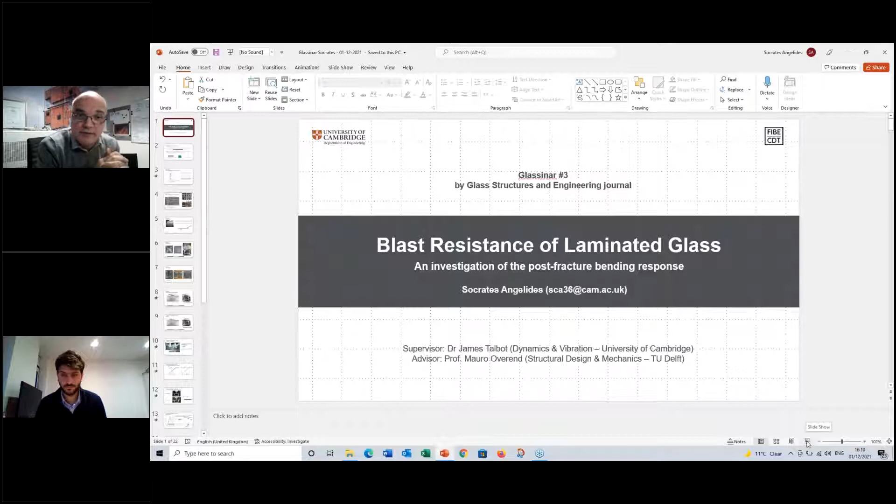So Socrates is, as his name might imply, originally from Greece, but he studied civil engineering at Imperial College, with a master's degree there, and then he worked for three years as a structural engineer in the oil and gas industry, before eventually, in 2016, returning to university, where he joined the University of Cambridge to do a PhD in the blast response of laminated glass panels, under the supervision of Dr. Talbot. And I also am co-supervising his work, so I know a little bit about it.

But he's really developing some really exciting models on the mechanics of failure of laminated glass that could, I think, have a positive impact and provide information on how to design glass panels for blast loading. Socrates has also spent some time at TU Delft, and he's now a research associate at the University of Sheffield, where he is working on blast load prediction. This is a research project between the University of Sheffield and the Steel Construction Institute in the UK. But with that, I will hand over to Socrates to present his research.

Thank you very much, Mauro, for the kind words, and also thank you very much for inviting me to present in this third Glassinar. As Mauro has mentioned, this presentation will focus mostly on my research findings on the blast resistance of laminated glass. This presentation will primarily focus on two papers of the Glass Structures and Engineering journal, one that was published in 2019 and the other that was recently submitted. At this stage, I would also like to acknowledge the contribution from my sponsors, the Engineering and Physical Sciences Research Council and the Institution of Civil Engineers. These sponsors have sponsored my PhD, and I would also like to acknowledge the in-kind contributions from Kuraray, DJ Good and Associates, and Tough Glaze.

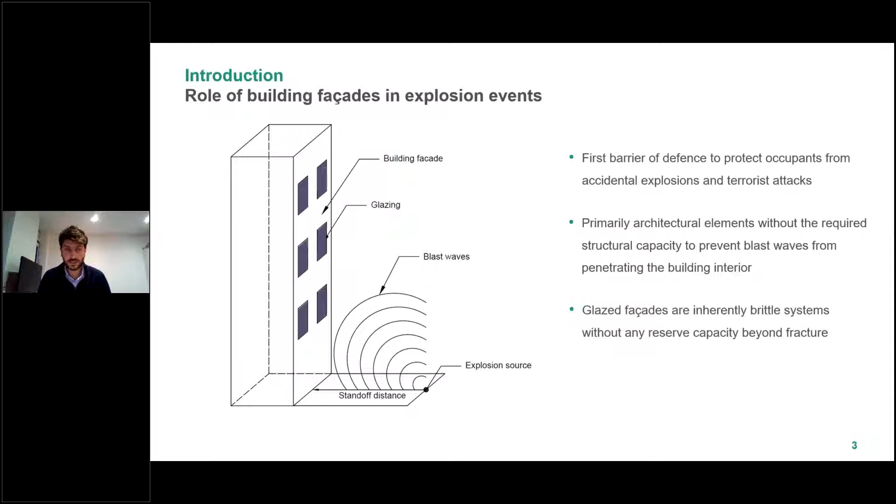Renewed focus on the threat posed to buildings and their occupants by terrorist attacks has intensified the demand for blast-resilient buildings. This requires facades to act as a first barrier of defense to protect occupants. However, these are primarily architectural elements and are often inherently brittle, as is the case for glazed facades. Multiple glazing failures were observed in the recent disaster in Beirut, with many damages occurring kilometers away from the explosion source. Consequently, the blast wave penetrated the building interior, resulting in financial damages and harming occupants. Additionally, a large percentage of injuries were glass-related, as is often the case in most blast events.

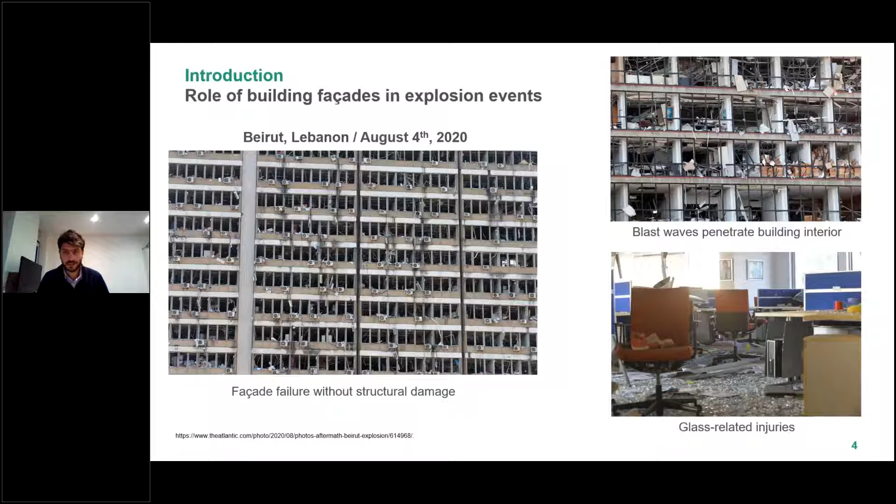As a result, laminated glass is increasingly installed in facades to enhance the blast resilience of buildings. These composite panels offer residual resistance and are capable of providing resistance beyond the fracture of the glass layers, and also reduce glass-related injuries as the glass fragments remain attached to the interlayer. The blast response of these panels, however, is complex and often requires assistance from blast testing to validate designs.

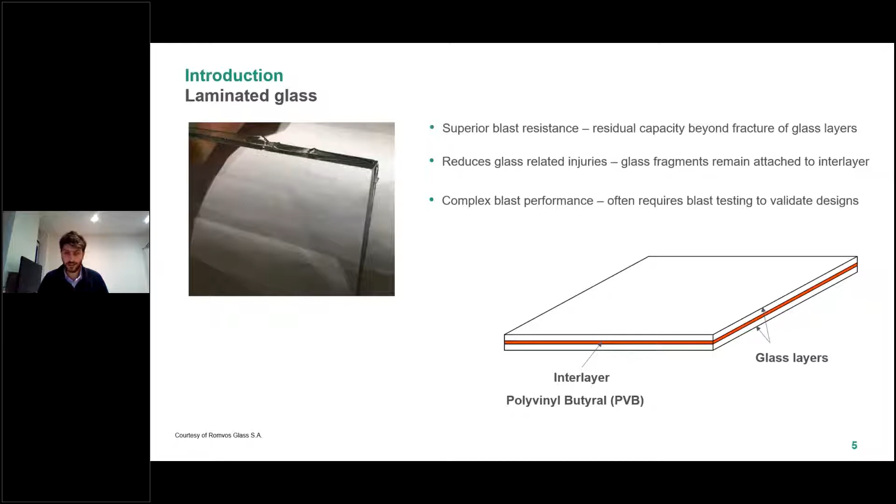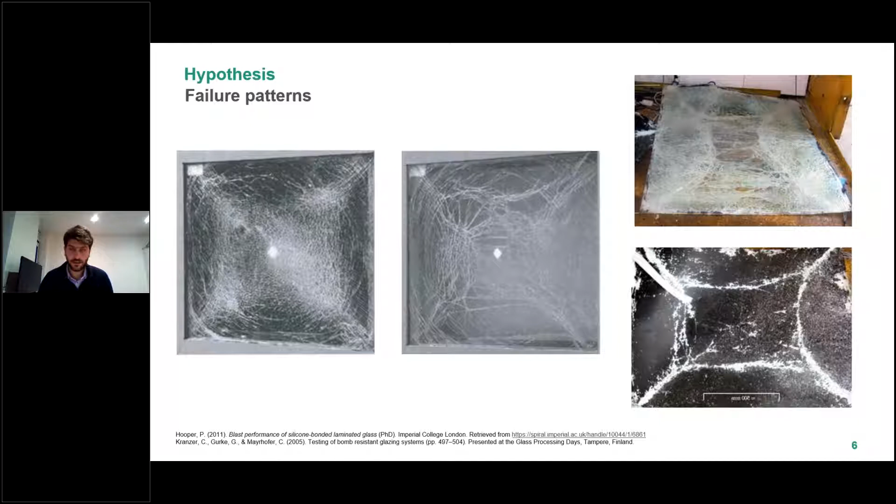The starting point in my research was to study the failure mechanisms in laminated glass recorded by previous researchers during full-scale blast tests. I observed a repeated failure pattern that was consistent in almost all tests. This failure pattern resembles the yield line mechanism forming under bending in reinforced concrete slabs. Given the similarities between laminated glass and reinforced concrete, that is, both are brittle materials reinforced with a ductile material, I decided to investigate if this repeated failure pattern in laminated glass is in fact a yield line pattern.

To achieve this, I first examined if there is any residual post-fracture bending moment capacity in laminated glass following the fracturing of the glass layers. My second objective was to assess if the effects of inertia experienced by laminated glass panels during a blast event are responsible for the different pattern observed compared to the well-known yield line pattern forming under static loading in reinforced concrete and other ductile materials.

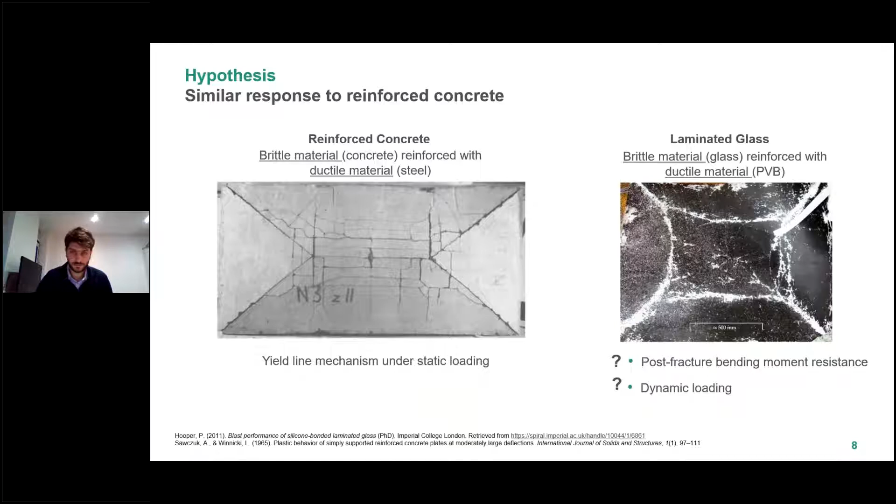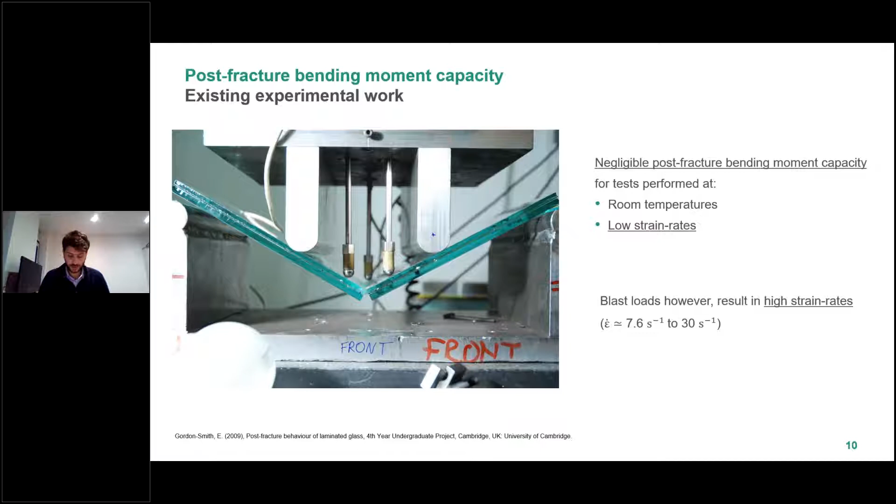Starting with the post-fracture bending moment resistance of laminated glass, previous experimental work on pre-fracture specimens has demonstrated that this is negligible for specimens with polyvinyl butyral interlayers. However, these tests were performed at low strain rates, as opposed to the high strain rates anticipated under blast loading. This is important as the PVB interlayer is a thermoplastic polymer that becomes significantly stiffer at high strain rates. The response under blast loading is therefore fundamentally different compared to the previous experimental work at low strain rates.

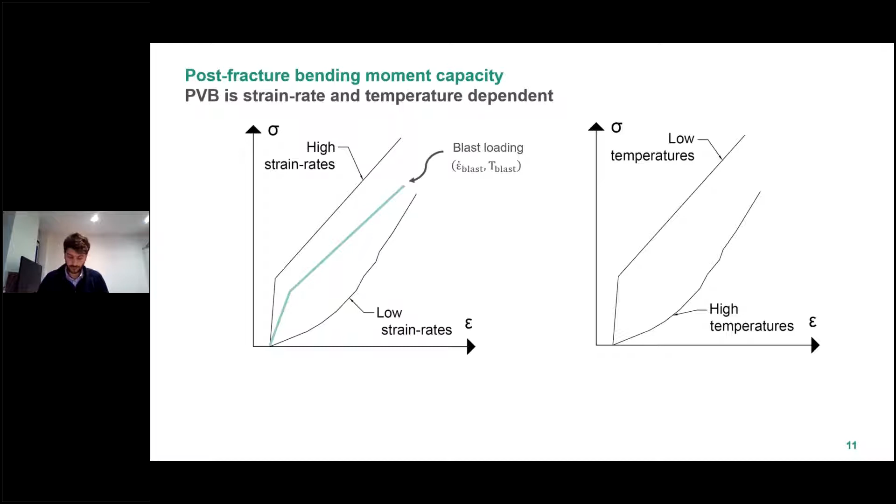PVB is also sensitive to temperature, and using previous experimental work, I demonstrated that there is a time-temperature dependency similar to many other polymers. Therefore, the PVB response at high strain rates can be simulated with low temperatures by deriving a time-temperature mapping equation. This uncouples inertia effects and allows the investigation of the pseudostatic bending moment capacity.

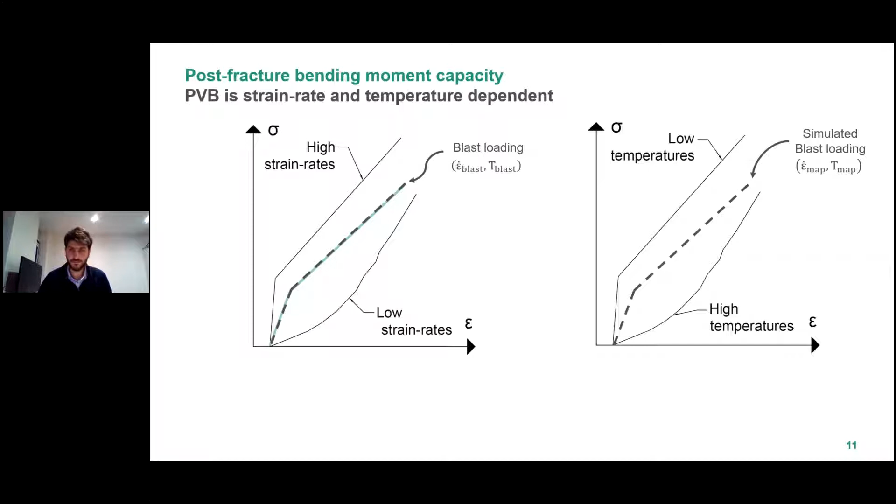Quasi-static bending tests of pre-fracture specimens were therefore performed at -100 degrees Celsius and were compared to room temperature tests to assess the influence of high strain rates. An idealized pre-fractured pattern was considered with the cracks aligned in both glass layers and spaced every 20 millimeters. Using the mapping equation derived, a maximum PVB strain rate of 25 per second was calculated at a temperature of 25 degrees Celsius, which is a typical value expected under blast loads.

A comparison of the load displacement response recorded from the low and room temperature tests indicates a significantly stiffer response at low temperatures. The results of the low temperature test demonstrate an enhancement of the ultimate load capacity of the fractured glass by 2 orders of magnitude compared to that at room temperature. This suggests an improved post-fracture bending moment capacity at low temperatures associated with the now stiffer interlayer working in tension and the glass fragments working in compression. Due to the time-temperature dependency of the PVB, a similar enhancement is therefore anticipated at the high strain rates associated with typical blast loading.

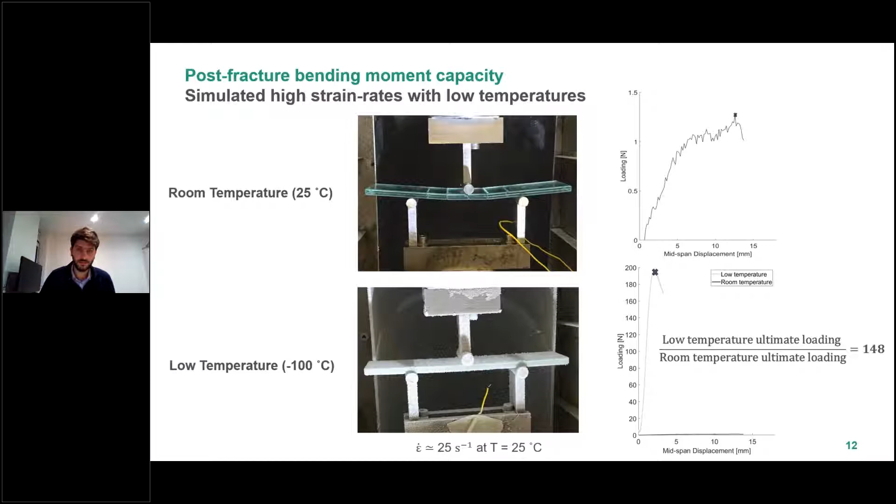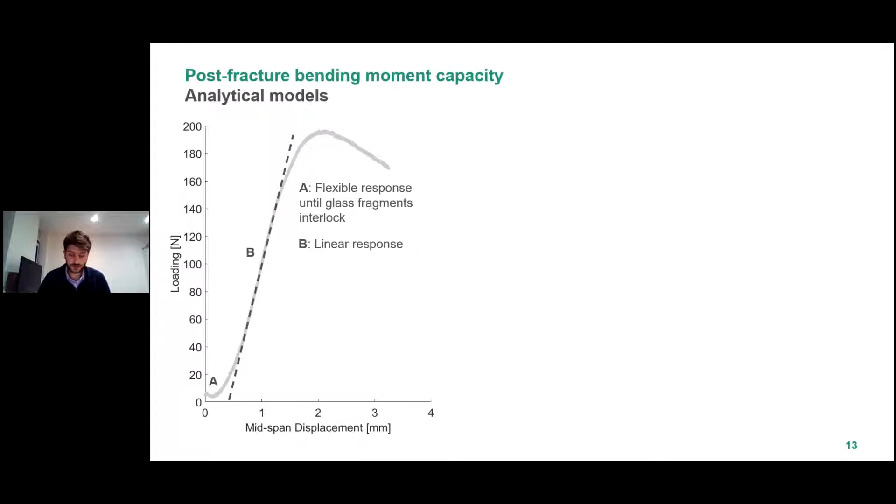Based on the experimental results from the low temperature bending test, analytical models were developed to describe the post-fracture bending moment capacity of laminated glass. Following the initial flexible response until the glass fragments interlock, a linear response is observed and the fractured panel bends elastically in a composite manner. At this stage, the PVB is in the initial slope of its stress strain diagram, and although it resembles an elastic material, it in fact remains viscoelastic.

The bending moment capacity was derived for this stage under the assumptions of plane sections remaining plane and by applying the transformed section approach commonly used in analysis of reinforced concrete. The compression component in the bending moment is provided by the glass fragments that come into contact as the panel deforms, and the tension component is provided by the interlayer. A nonlinear response is observed in the next stage due to the change in slope in the PVB material model. Although this transition point is often referred to as yield stress, it only refers to the stress at which a significant change in modulus is observed rather than the onset of true plasticity.

A plastic hinge eventually forms when the top glass layer crushes in compression, resulting in a collapse mechanism for the simply supported specimens tested. The moment capacity for this stage is derived by taking moment equilibrium about the plastic neutral axis. In the final stage, the PVB tears when the failure strain is reached. The response, however, is anticipated to be more ductile under blast events, as the low temperature results in a stiffer adhesion bond that inhibits the delamination of the glass fragments and causes brittle fracture of the PVB.

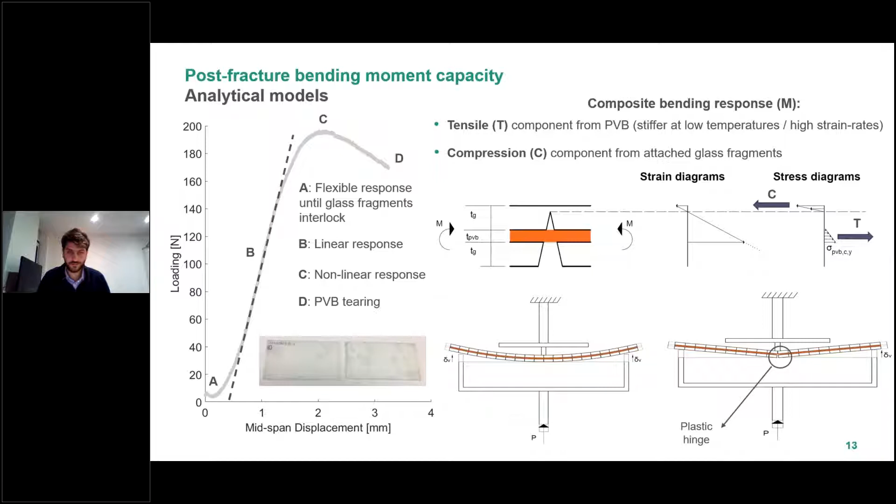The exact same tests were also repeated on specimens with both thicker glass layers and thicker interlayers. An increased ultimate loading capacity and therefore post-fracture bending moment capacity was recorded consistently for all the thicker specimens tested. Therefore, the experimental results were in agreement with the predictions of simple bending theory.

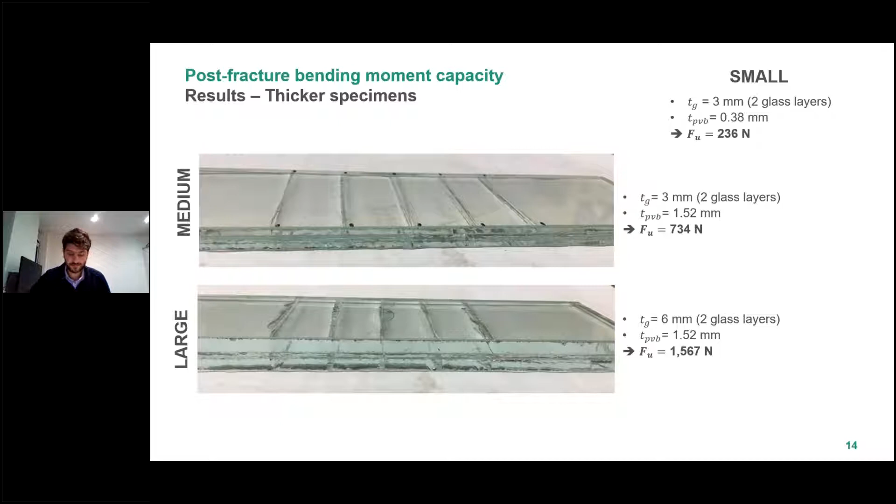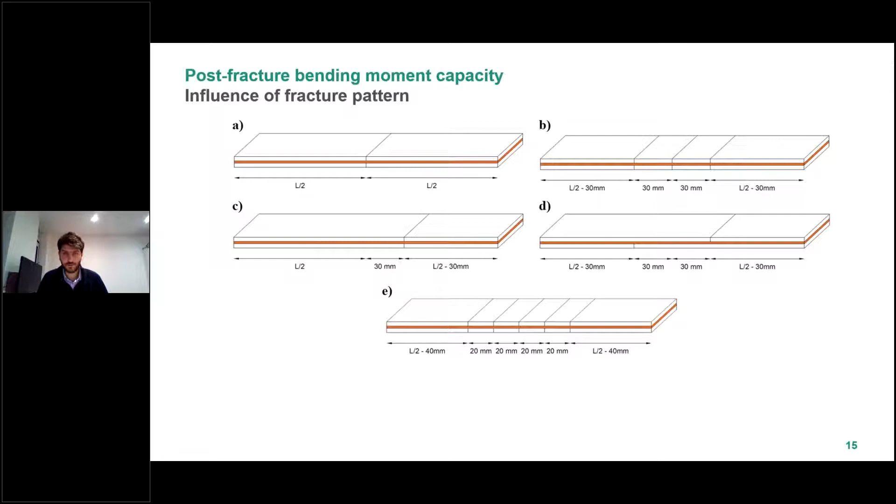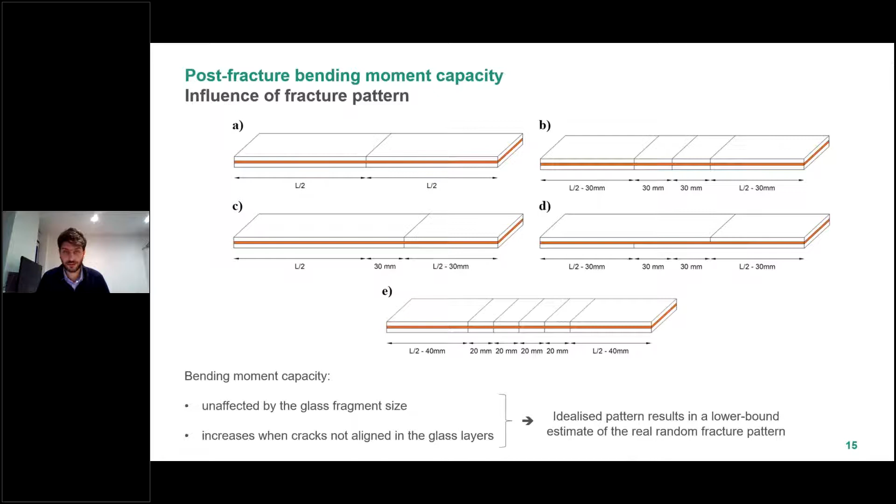To assess if the idealized pre-fracture pattern considered is representative of the random fracture pattern forming under blast loading, the low temperature bending tests were also repeated on specimens with different pre-fractured patterns. The key conclusions of this investigation were that the bending moment capacity is unaffected by the glass fragment size, and it also increases when the cracks are not aligned in the glass layers. Therefore, we can conclude that this idealized pattern will result in a lower bound estimate of the post-fracture bending moment capacity for a specimen with a real random fracture pattern forming under blast loading.

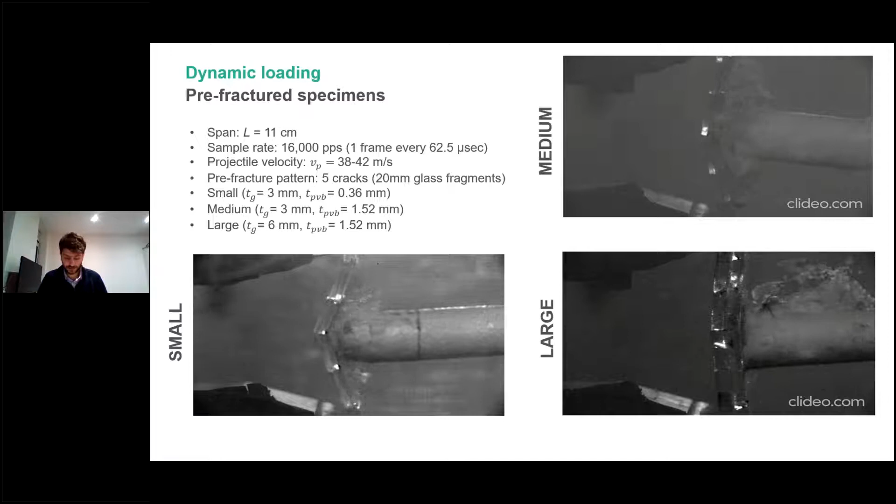Now moving on to dynamic loading, to investigate the effects of inertia, I performed impact tests by launching foam projectiles from a gas gun and recording the response with a high-speed camera. The pressure time history resulting from this impact simulates the positive phase of blast loading. The same specimens, pre-fracture patterns, and span as the low temperature bending tests were considered in the impact tests to directly assess the influence of inertia.

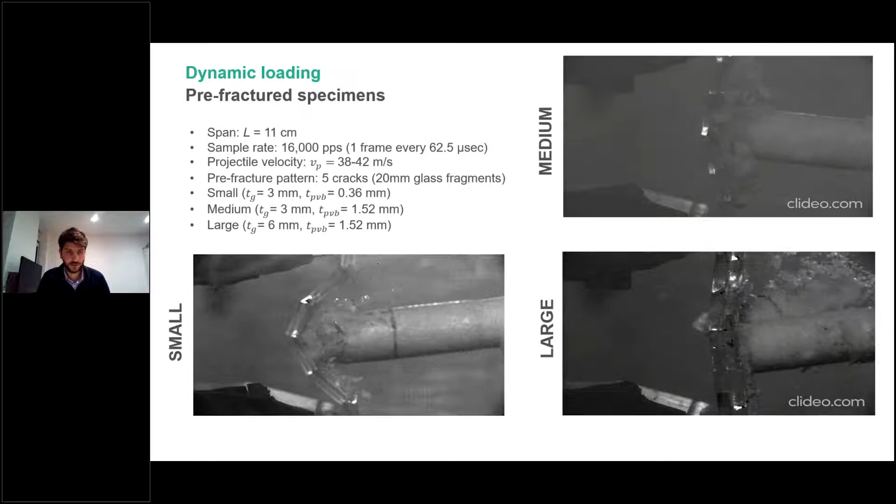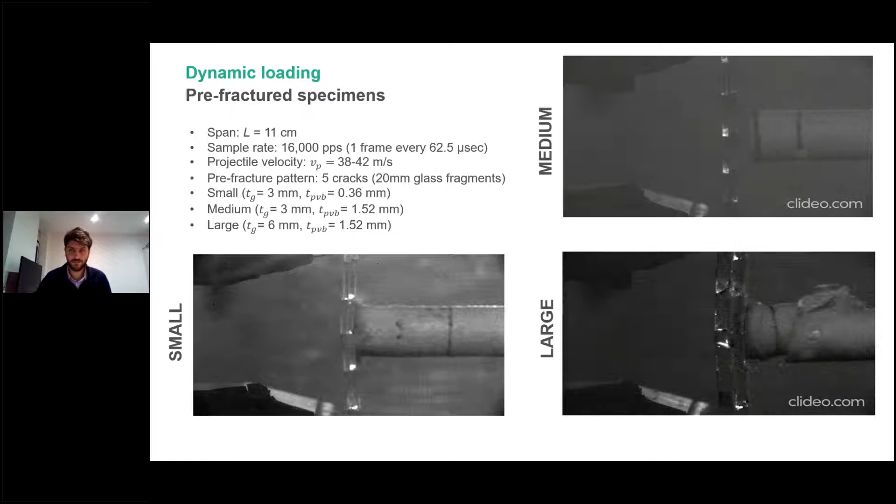PVB tearing was observed in the smaller cross-section specimens, as can be seen in the lower left video. You can see the tearing occurring right now. On the other hand, the medium and larger cross-section specimens were able to deform under large deflections without the interlayer tearing, as observed in the other two videos on the right-hand side.

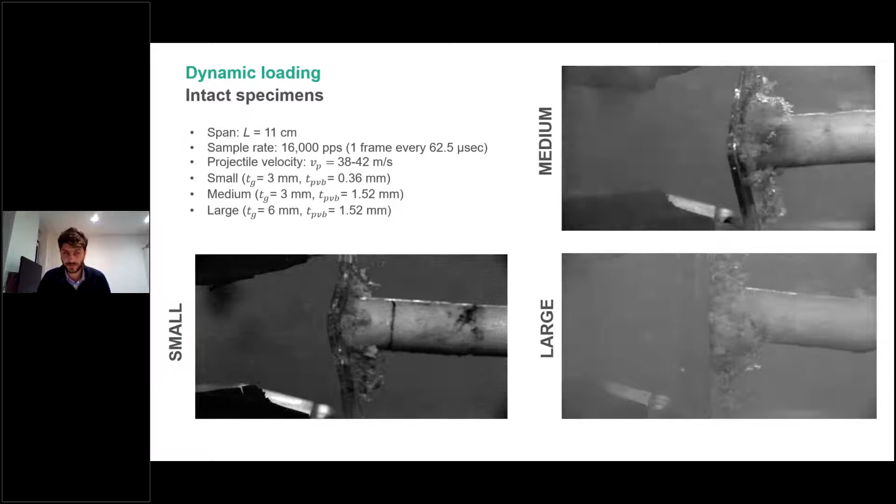The same tests were also repeated on intact specimens to assess the transition from the intact stage to the post-fracture stage. In this case, the loading was not high enough to fracture the larger specimens, as observed in the bottom right-hand video. The response of the smaller and medium cross-section specimens was similar to that observed for the pre-fractured specimens.

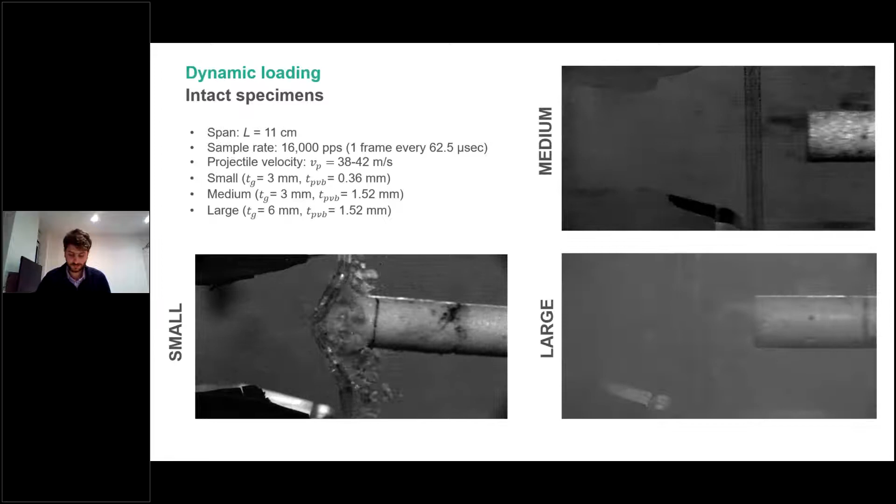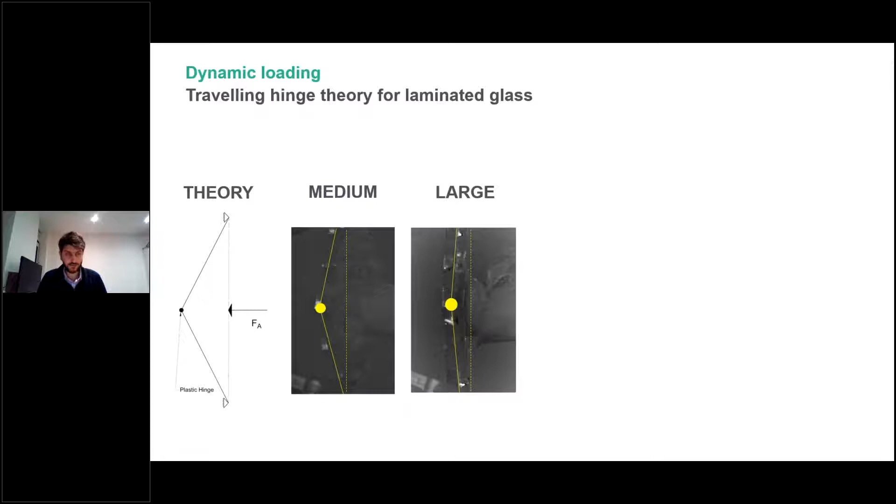The deformation patterns recorded with a high-speed camera demonstrate that the theory of traveling hinges applies to laminated glass. A global collapse mechanism, with the specimens deforming as two rigid bars connected with a single plastic hinge at midspan, was observed for the medium and large specimens. This agrees with a well-known collapse mechanism forming in simply supported beams under a static point load at midspan.

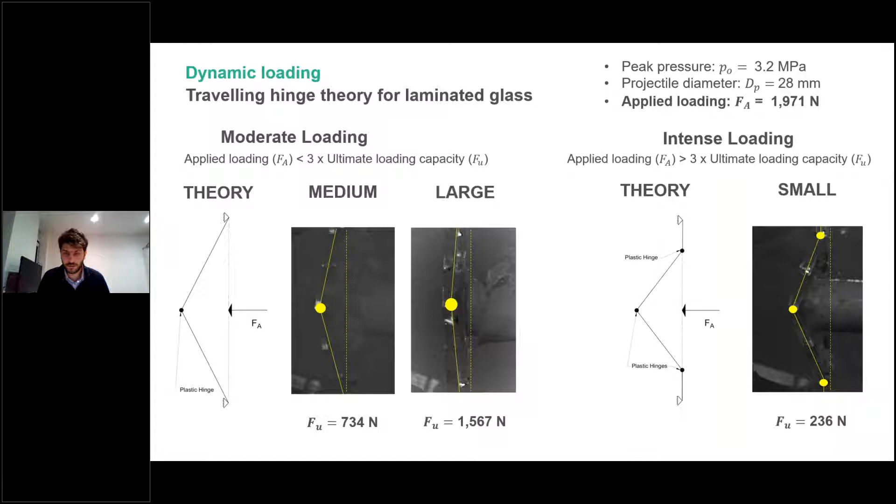On the other hand, the collapse mechanism observed for the smaller specimen is more localized, and 3 plastic hinges can be observed. This agrees with the theory of traveling plastic hinges when a short duration pulse with intense magnitude loading that is greater than 3 times the static collapse mechanism is applied. This was actually the case for the smaller cross sections tested here, when considering the recorded ultimate loading from the low temperature bending tests.

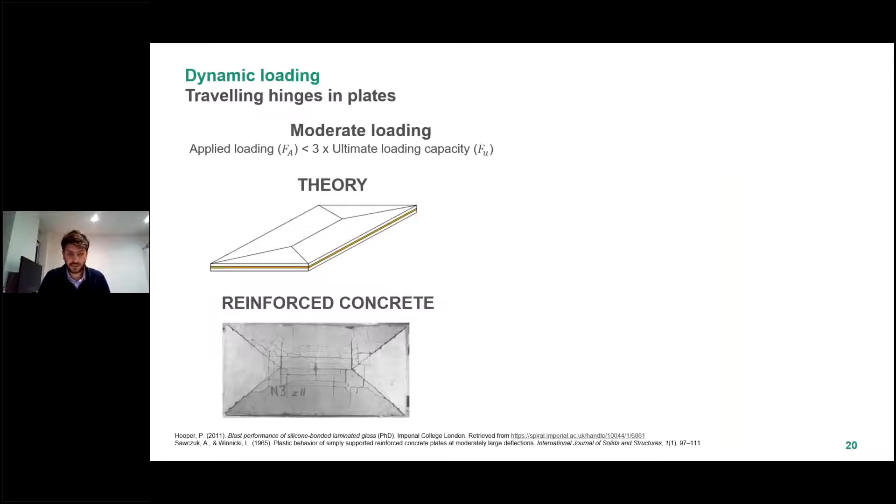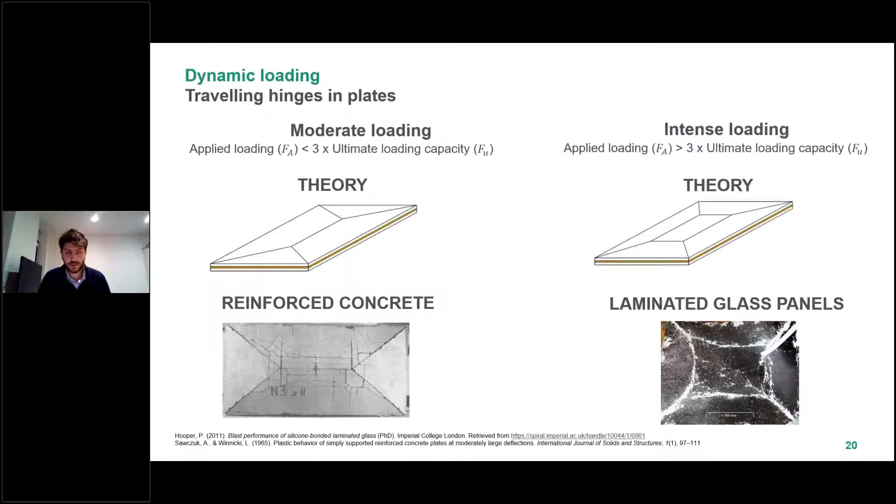These conclusions from the one-way spanning beam specimens are very important, as when these are extended to 2-way spanning plates, it can explain why we observed a different yield line pattern in reinforced concrete when a uniform static load pressure is applied, compared to laminated glass when a dynamic short duration intense magnitude loading is applied to the entire panel. And this is why we see a different yield line pattern.

Therefore, these simplified small-scale tests, namely the low-temperature bending test and the impact test by launching foam projectiles from a gas gun, were able to demonstrate that the repeated pattern that we observed from blast tests is due to an enhanced post-fracture bending moment capacity occurring due to the effects of strain rates. Due to the inertia arising from dynamic loading, we observed a different yield line pattern compared to the static loading.

The next steps of my research will try to focus on how to complement or improve existing analysis methods or testing methods for designing laminated glass panels under blast loading. Thank you very much.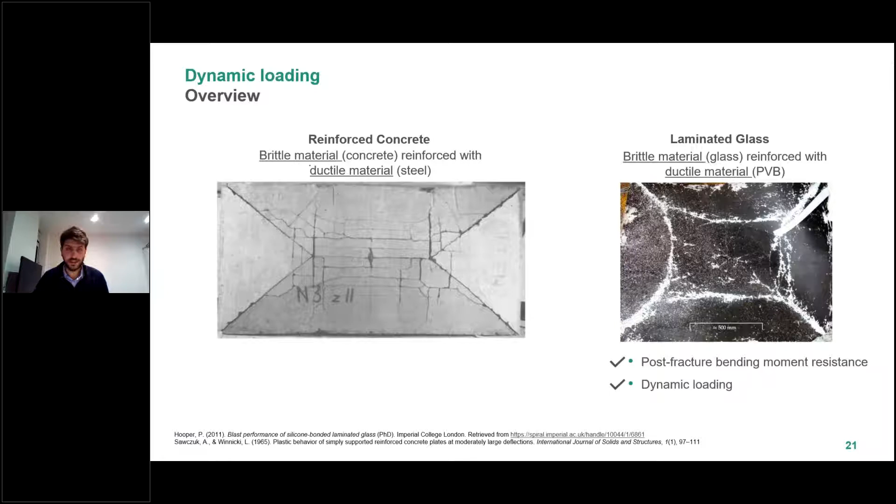Thank you very much, Socrates. That was really very well presented and very clear.

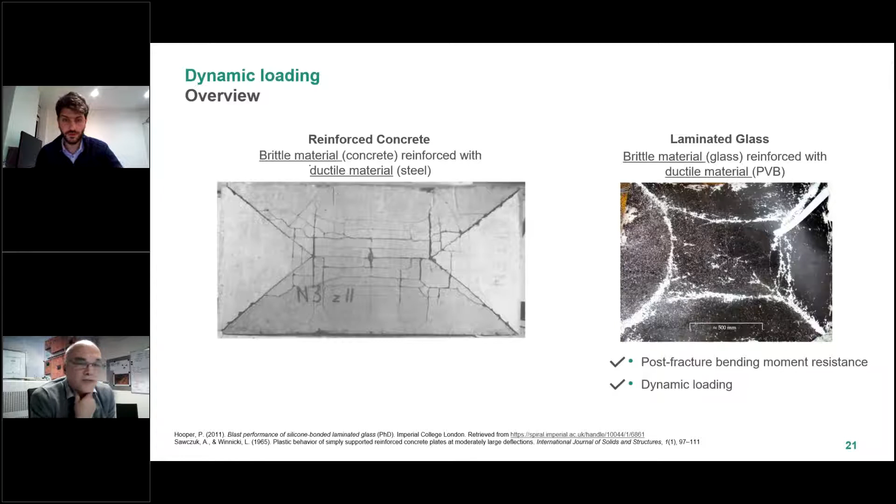Yeah. Thank you. I think to some extent that's the power of the method that you are proposing, right? That these yield lines actually form as long as you have fragmentation in your glass from some event. Then you can set up this yield line pattern on the glass. And maybe you can give us a sneak preview: you have already some ideas on how this could be validated on a larger scale. It's not necessarily something you might do in your research, but as a follow-on. How could we validate these findings on a larger scale?

Yeah, so I imagine some ways of doing that would be extending the test to two-way spanning plates. So either doing shock tube tests with two-way spanning plates and observing the bending response and seeing if these yield lines will form. I think I've seen some papers that can record the deformation at different timestamps, and you can see the fragment pattern evolving with time. So this is a good start to say that we've seen it in one-way spanning with simply supported beams with a point load in the middle. We've seen it with two-way spanning plates with a uniform pressure. So that's a good start to say that this theory of traveling hinges actually applies.

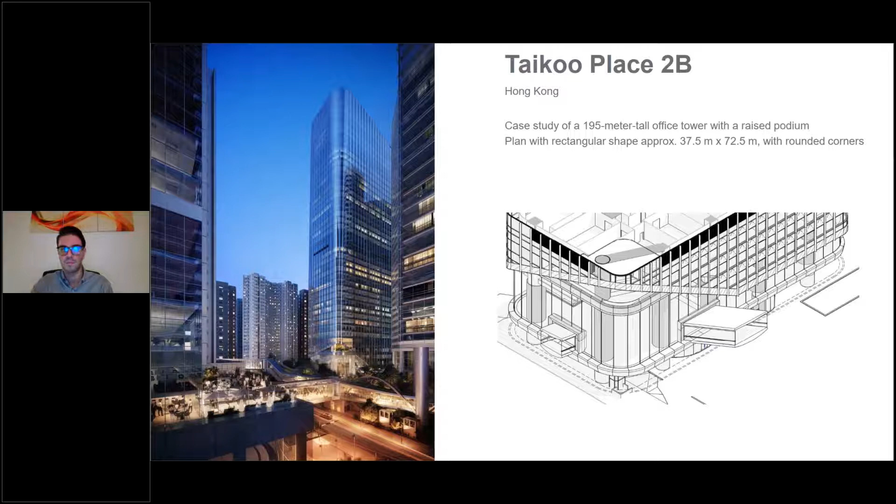Hello, thanks Jan for the introduction and for having me here. So as you said, we're going to talk through the glass facade of the Taikoo Place 2B podium wall. Taikoo Place is a 195-meter tall office tower in Hong Kong, with a rectangular shape of approximately 40 by 70 meters. We carried out the design of the whole facade system, so also the curtain wall and the ground floor area. But what we are going to focus on now is the design of the podium, which wraps around the four sides of the facade.

The design intent from the client and architect was to have maximum transparency to show the grace room, as the architect calls this podium area. Different options were explored in the schematic phase of the project, from glass fins to cable wall facade, but nothing was really going towards the aim and the brief of the facade. So at the end, what we pushed forwards was this kind of hybrid solution, which sees jumbo glass panels, so full height glass panels supported by pre-stressed stainless steel rods, which lie entirely in the buildup of the glass. So they don't add any depth to the facade, and therefore they maximize the transparency and the show of the grace room, as you can see from these renders from MBJ, the architect.

For the system description, the facade was wrapping around all four sides of the podium, but clearly with varying height, and therefore not all the areas needed a pre-stressed cable. So in the four elevations of the podium, we show where the pretension facades are. In this area the glass is up to 15 meters tall, while in all the other areas the glass goes up to 4 meters, and the system was basically a simply supported beam spanning from top to bottom.

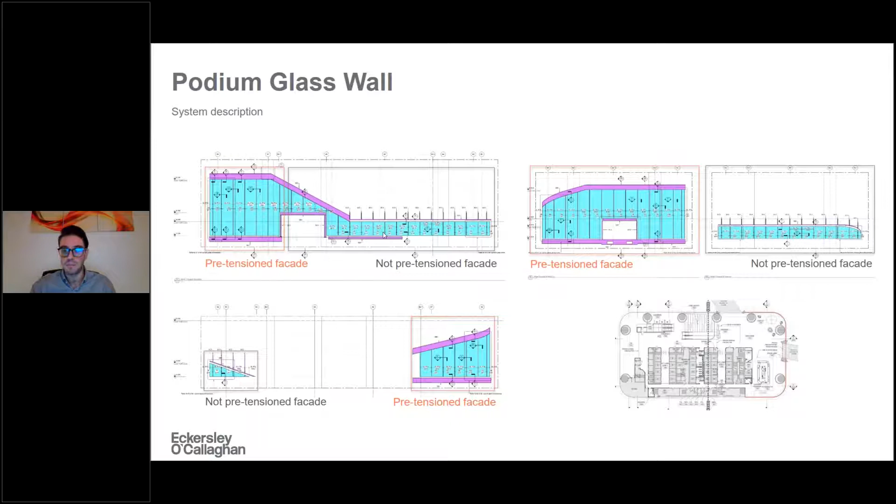The system itself sees basically an independent set of top and bottom steel structure, which spans between the columns, and the span between the columns can be up to 21 meters in this project, because there are a minimal number of concrete columns for the primary structure. The rods are therefore connected to the two beams, spanning top and bottom from the two beams.

While the glass is sitting on the bottom steel beam, so therefore the dead load of the glass is entirely taken by the bottom beam, and is clearly restrained laterally for out of plane loads and connected to the rods on the two vertical edges and to the top and bottom steel beam on the short horizontal edges.

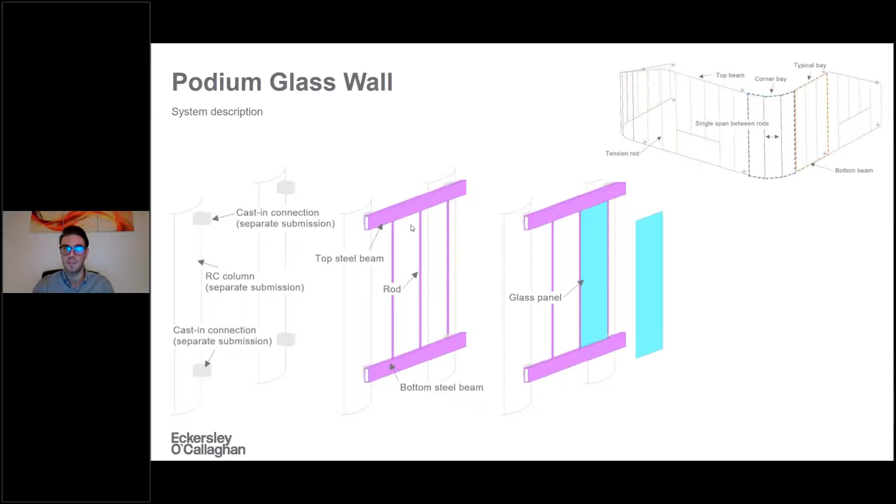One of the critical areas, probably the most interesting area of the project, was clearly the corner. And this is because of the shape of the facade, where we have this rounded corner, and therefore the interfaces between flat and curved, and then again flat panels. Because of the geometry, because of the high load, we're talking about a Typhoon area as mentioned in the title, therefore we got a peak of 3.5 kPa of wind load as a characteristic load here. So quite a high load, especially for the span of the facade, 15 meters.

Therefore, we had to understand a bit better the behavior and how to cope with these different interfaces that we have. What we did was identifying mainly three interfaces. What we call the typical interface A, which is basically between flat panels, which experience a very similar behavior as the geometry is similar. And then we identified interface B, which is between curved panels. Because of the geometry, the two curved panels will tend to move radially in different directions. Therefore, they will experience mainly tangential expansion when under suction, and the joint between the two glass panels will tend to expand.

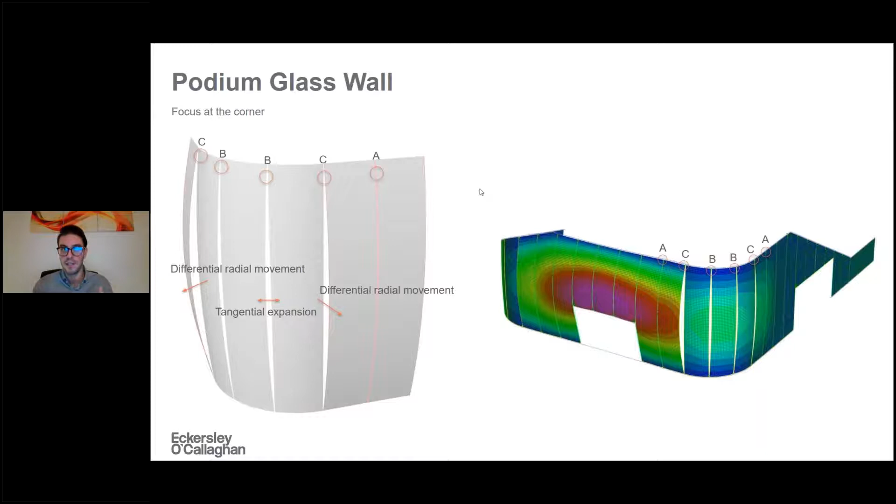And a slightly different interface is what we identified as interface C, between flat and curved panel, where because of the two different stiffnesses of the flat and the curved panel, the two panels will experience not only a differential direction of movement, but also clearly the flat panel being less stiff will tend to deflect much more than the curved panel. So we will have to cope with some differential radial movement between the two adjacent panels. The way we thought to address this

challenge was to define different interfaces in terms of rod and glass connection. So for position A, the typical one between flat panels, we designed a single rod which clamps the two panels, and therefore, when the panel deflects, the rod is followed by the two panels. What's happening in positions B and C, because of this differential radial or tangential movement, what we developed was a system with two rods, which are then only connected by a movement joint. Therefore, they are free to move differentially outwards and tangentially. And therefore, the two panels connected and clamped to the double rods can experience the differential movement that they will naturally have under wind load.

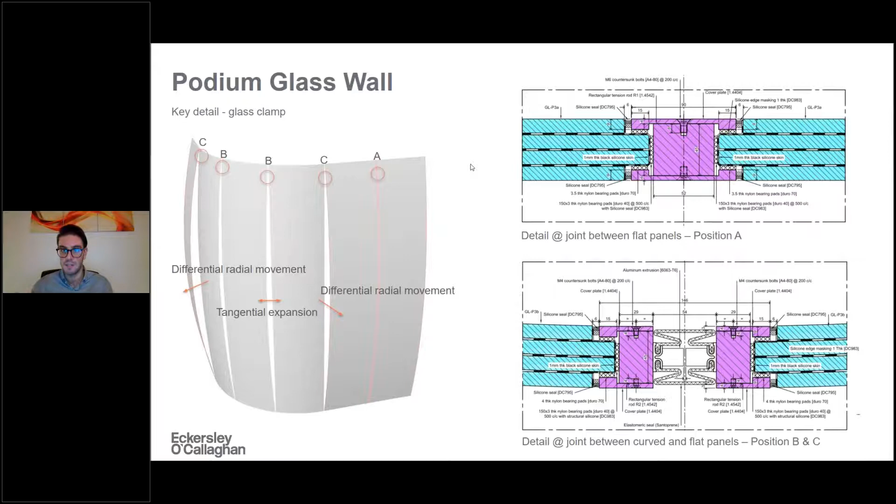Other key details to cope with the high deflection of this facade and to cope also with the openings that are required in the facade was a rocking portal frame on the main elevation, the east elevation. Here, because the elevation has full height panels for the full elevation, basically, we had to try to reduce as much as possible the stress concentration that we would have had on the two corners of the portal frame, because if the portal frame were to be fixed, clearly the deflected shape would have been very different compared to the one of the adjacent panel, creating a lot of stress concentration.

While with the rocking portal frame and providing a pin at the base of the portal frame, we tried to allow the portal frame to follow much more the deflection of the glass and the rods. Therefore, the portal frame is not independent out of plane because it's not stable, and therefore needs to be restrained back on the side to the adjacent rods.

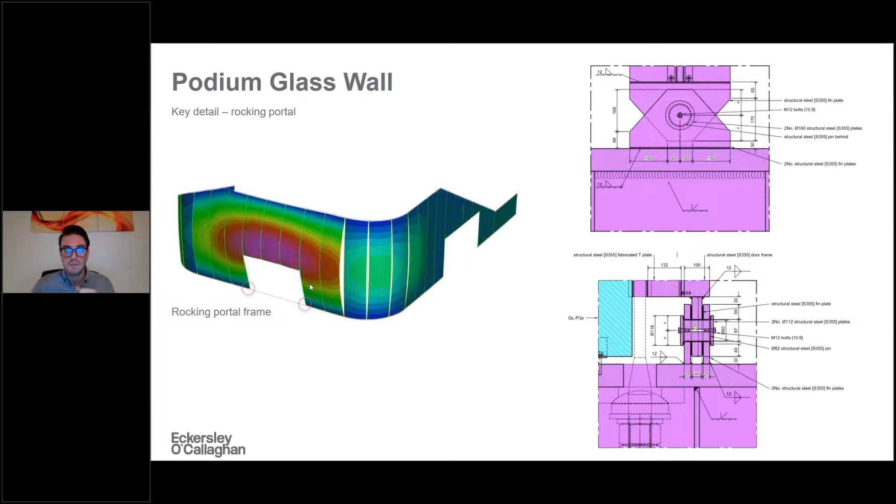One of the other issues was really to design the bottom detail where the rod anchors to the steel beam. Initially we went for a spherical bearing scenario, although then because of some issue with the approval authority on the specific product, we swapped to a high-end type of rod, with this kind of fork with a pin. The further issue on that was to check with the lateral drift if the drift-induced bending stress in the rod was small enough to be absorbed.

Luckily, the drift limit for the tower designed by the primary engineer was quite strict, so we had a deflection of about height over 800, so about 18 millimeters of lateral drift between top and bottom.

Therefore, there was not much issue in switching from a spherical bearing to a single plane of hinge like this connector here. And another important thing to consider was clearly thermal expansion in the main beam. As I was saying, main beams were up to 21 meters long, spanning between two columns.

So thermal expansion or contraction would have generated quite a lot of axial stress in the beam, and therefore, since the beam was eccentric from the RC column, this would have generated massive shear and torsion also on the concrete column. So we wanted to avoid that, and also we wanted to design a connection which was really able to

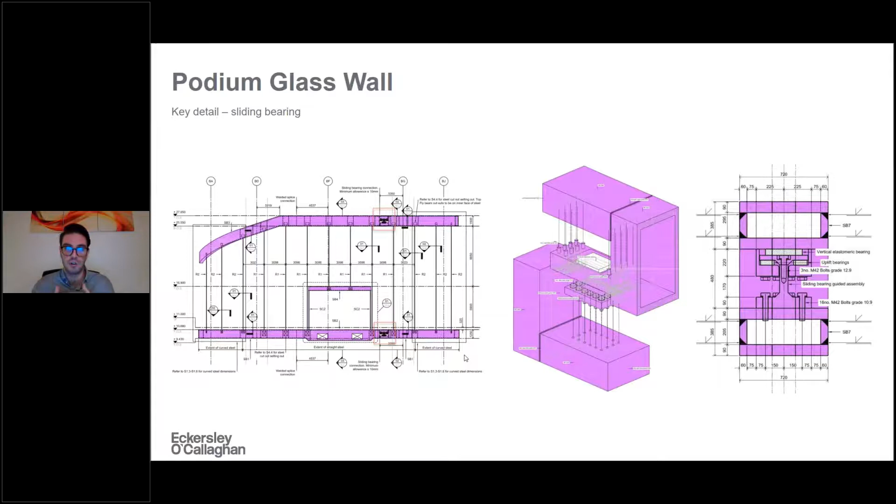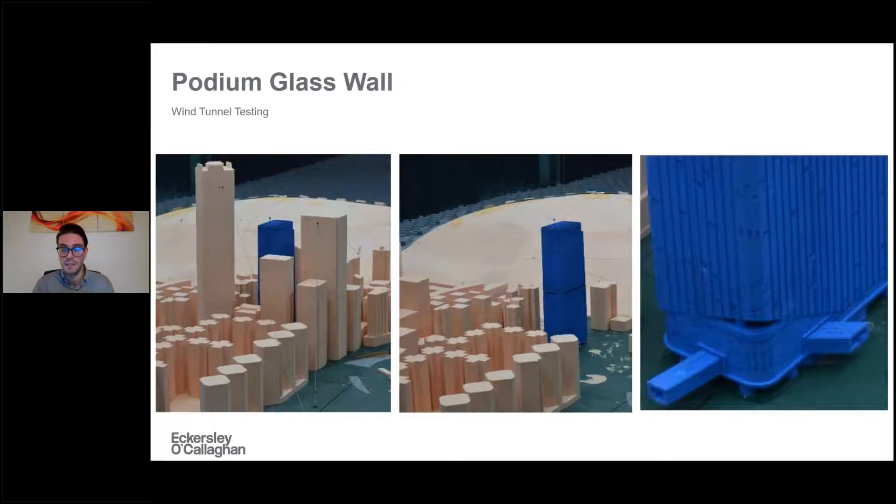But together with the wind tunnel testing, as this facade cannot be analyzed as a standalone, it needs to be analyzed on its whole elevation. We also fed the wind tunnel test analysis with some modal information of the behavior of the facade, trying to understand not only what are the peak pressure and suction to be applied as wind load on the facade, but also their distribution across the facade and the correlation between pressure and suction in all the points of the facade.

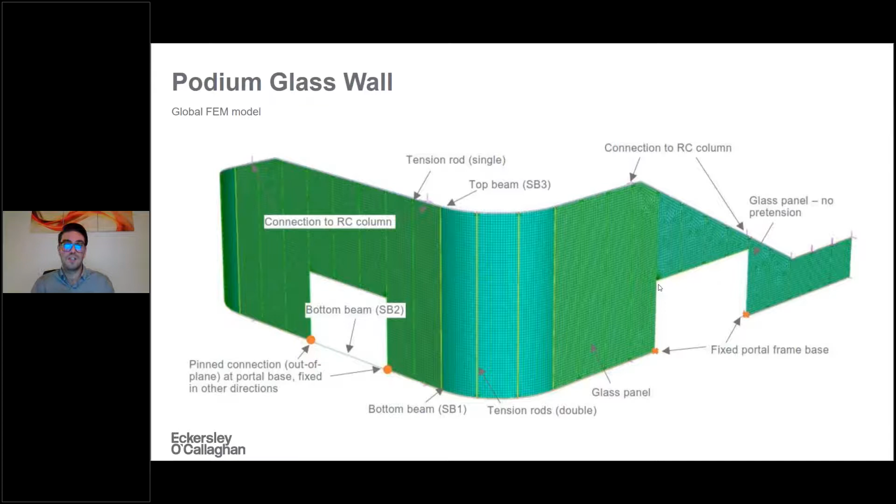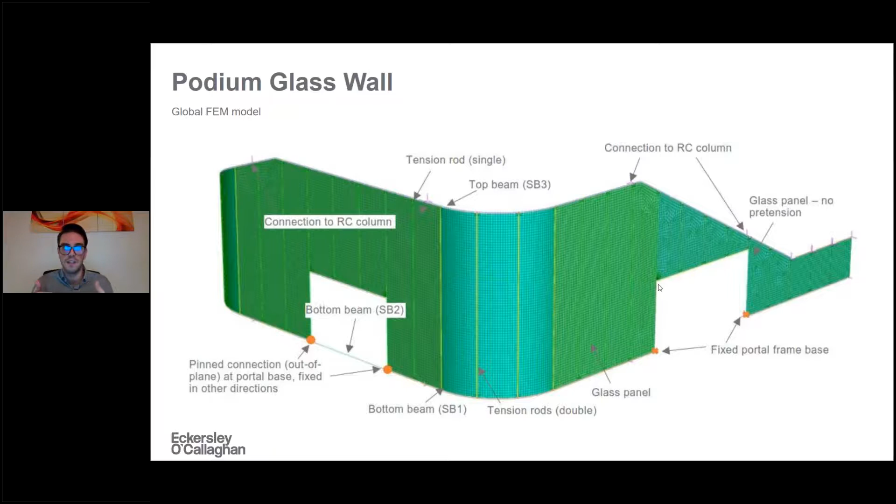So everything was then fed into a quite refined global FEM model, which was used as a benchmark for the design, and included all the possible components that we could model reasonably for the facade. So not only the glass panels and the rods obviously, but also the top and bottom beams and the connection to the RC columns were included. All the portal frames, columns and beams were included as well, and also the connection between the glass panels and rod was simulated by a so-called connection element in the software, which allowed providing only the lateral out-of-plane stiffness, which was actually the one coming from the details.

And again, here just some focus on the two portals, which have been treated differently. As I was saying, the east one, because of the full height facade, was assumed to be a rocker, so we have a pin connection at the base, and therefore a connection back to the tension rod on the side. While the north portal, because the facade height goes down quite quickly here, and therefore the deformed shape of the facade was slightly different, we could have a simple and normal fixed connection for the portal at that location.

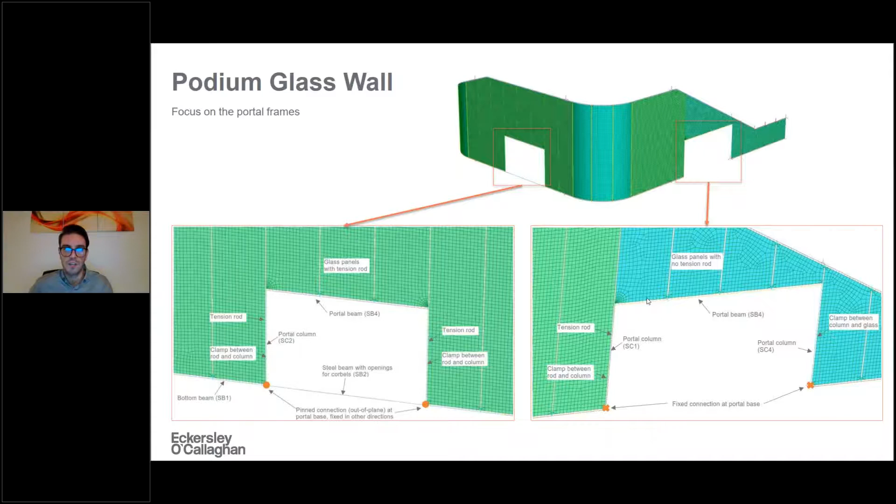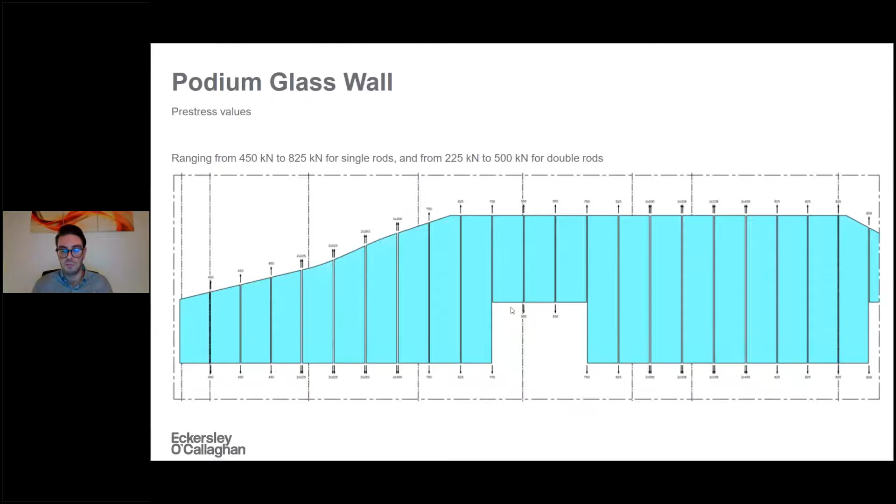In terms of pre-stress value, clearly that depended on the height of the rod. So the full height rods, the single rods of full height, 50 meters long, had pre-stress up to 825 kilonewtons, while the double rods have a preload range between 225 and 500 kilonewtons for the full height one.

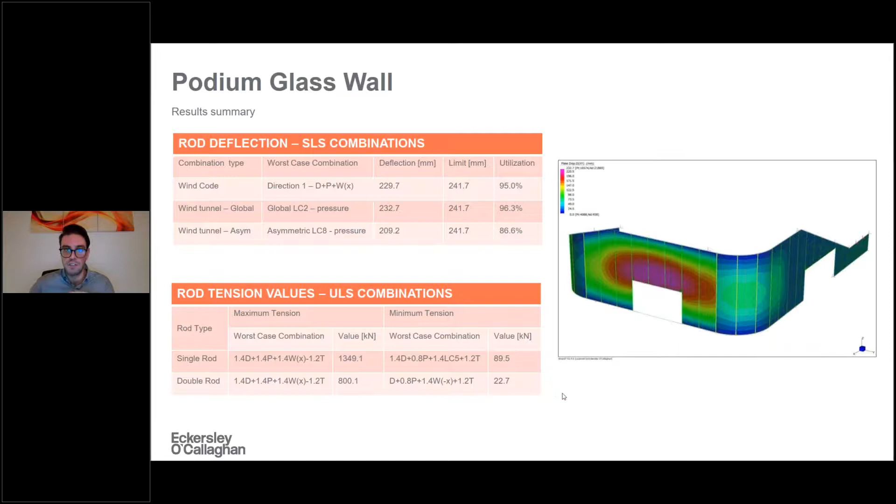One of the important things we had to do was clearly to understand the sensitivity of the glass, mainly to the pre-stress level of the rods. So we studied different scenarios for the rod pre-stress level. So not only the 100% design, let's say pre-stress, but we also analyzed other configurations with 80% of the pre-stress or up to 140%, just to have a load factor equal to the one of the permanent load as per Hong Kong standard. So obviously, it was interesting to understand what was the relationship, which is obviously not linear. So what we were seeing, especially when reducing the load in the rod, the deflection was increasing, and therefore also some of the stresses in the glass were higher. Therefore, we had to use this basically as a worst case scenario, mainly for the design of the glass.

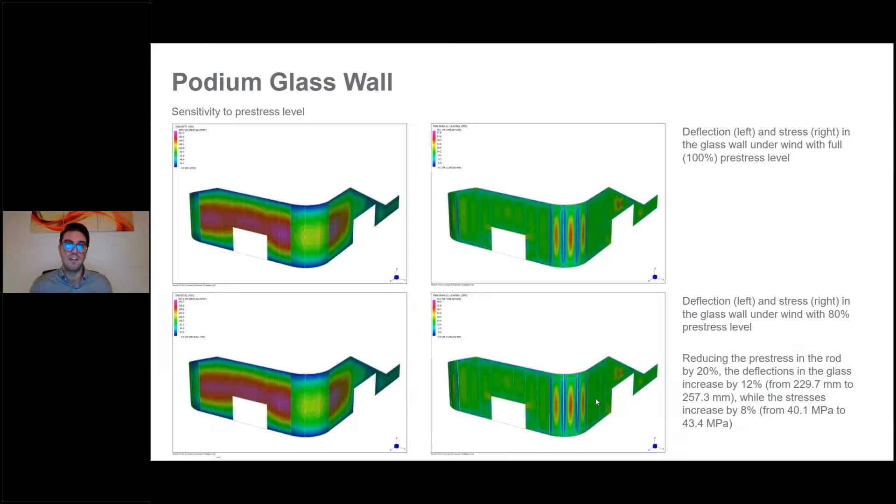One other important thing was trying to calibrate the tension value and pre-stress value in the double rod, because from one point of view we wanted really to have enough support from the rod to the glass, but at the same time you wanted also to not have too high pre-stress in this rod to avoid having very big differential movement between especially flat and curved panels. So it was a very interesting and iterative process to look at these different scenarios and try to balance and fine-tune the level of pre-stress in these cases.

And after we did that, we went through all the load case scenarios and plotted basically the differential movement between two adjacent panels. And from this, we were basically informed of how much the movement joint between the two rods had to be. So you can see here the diagram with all the load cases plotted against specific nodes to understand the relative movement between the two, and the calculation of how much the movement joint needs to be able to cope with and accommodate this movement.

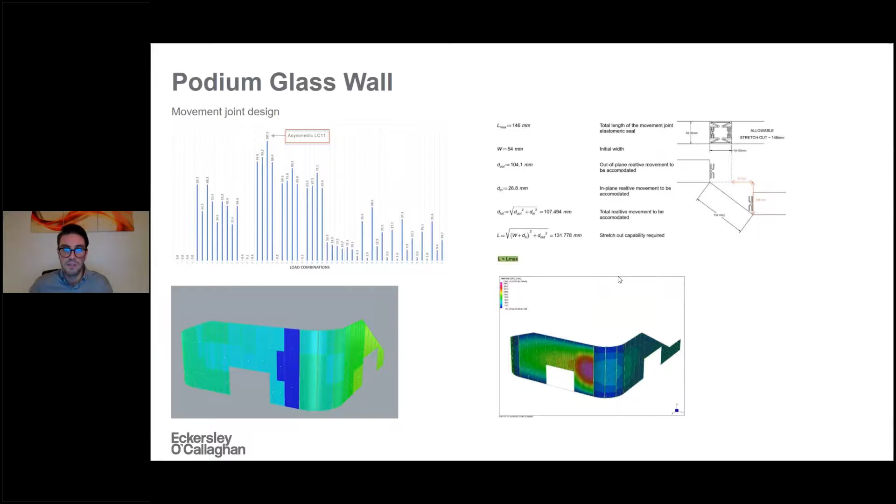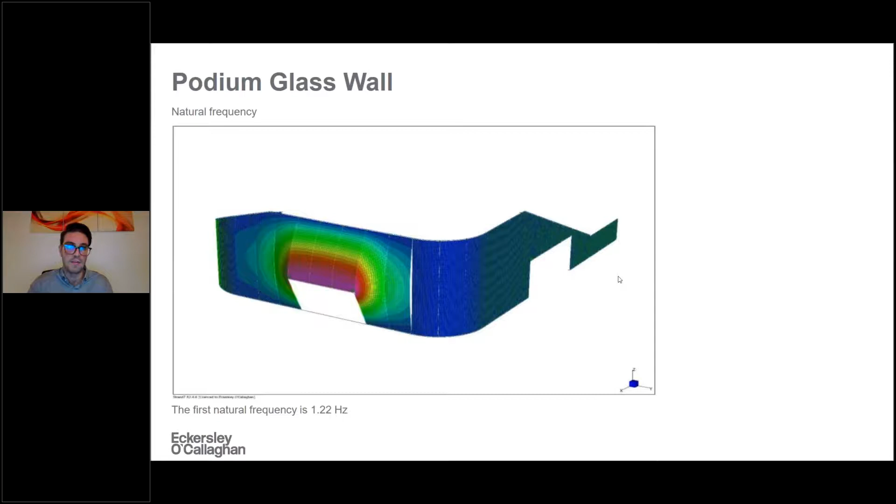From a natural frequency point of view, the code set a limit of 1 Hz to avoid further dynamic studies on the facade. In the very conservative scenario of just the pre-stress of the rods, the facade was having a natural frequency of 1.22 Hz, so above this threshold of 1. But it's worth noting as well that during the wind tunnel testing, as I said before, we had to feed also some modal information. So we were already accounting for some dynamic factor from the basic pressure values coming from the wind tunnel to the more advanced and refined ones that we were given when studying the facade as a single element, let's say.

For people who don't know, in Hong Kong the composite action of glass is still not taken for granted. Therefore, every time you want to use composite action in glass panels, you need to do a 4-point bending test. And even if the 4-point bending test returns 100% composite action, you're still limited to a value of 70% of composite action to be used.

So because we had to do this 4-point bending test, and because we were asked by the approval authority also to provide some brick models of the flat and curved panels to justify the analysis, we took the occasion of using the 4-point bending test also as a way to calibrate our brick models and show the authorities that the accuracy of the modeling was quite good. And as you can see here, this model basically tried to reproduce exactly the 4-point bending test glass setup.

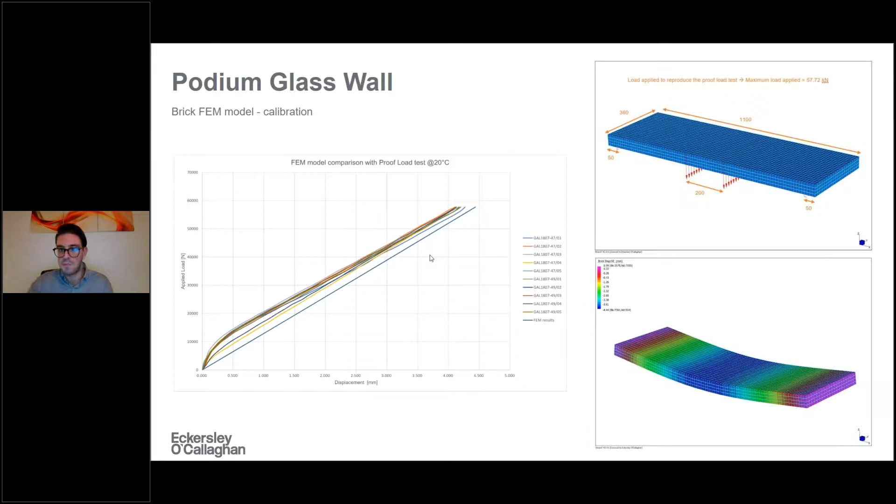And all these lines are the experimental results, basically the results from the test, and the straight blue lines are the results coming from our FEM model, which is pretty much in line with what the results are. So as I said, we use that basically to validate this brick model that we were requested to do, mainly to understand what was going on in this recessed area where the glass plies go from 4 to 2, to be able to engage in the clamp.

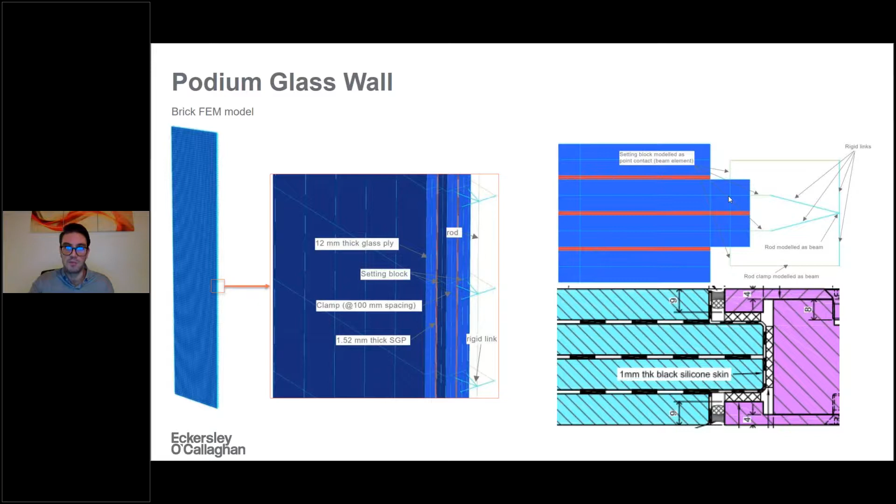And so we had to build also this model. We tried to be very accurate in building this, and we did it for both flat and curved panels. And what we saw from here, which was also something shown by the global analysis, was that clearly the flat panels are very much simply supported, behaving like a simply supported beam spanning between the two rods, with then a bit of lower stress here, where the glass is also supported by the top and bottom shoe to the steel beam.

While when looking at the curved glass panel, because of the fact that the rods are less pre-stressed, and because of the fact that clearly the glass shape has a better and bigger stiffness also to span from top to bottom, we have a bit more of a typical four-side supported stress distribution, where we not only have stresses at the center span, but also something going on at the top and bottom.

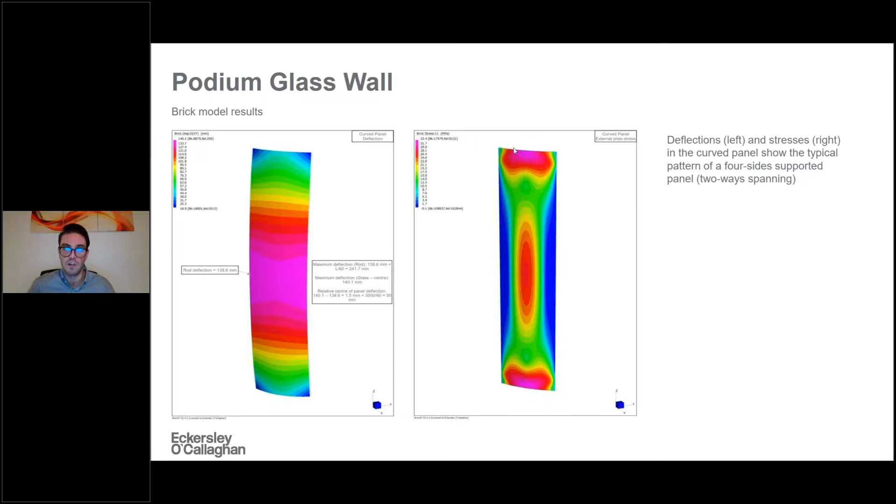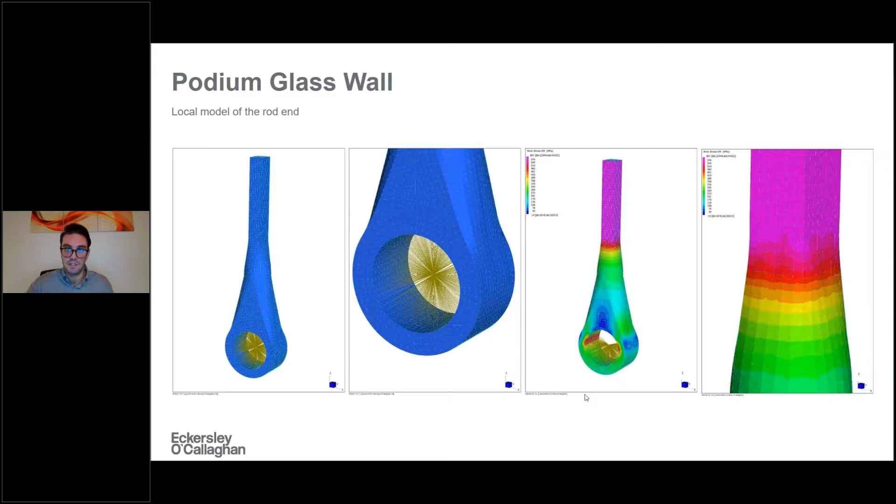In the local model, we had to build and analyze the transition between the rectangular shape of the rod, when it's interfacing with the glass, to this eye end for the pin connection at the bottom and at the top, and to study if there was any risk of stress concentration at this transition area.

And also something that was very important, that also informed the global model, was understanding the effect of the several openings that we have on the top and bottom beam, because clearly the rod needs to penetrate the beam to be anchored, and at the same time we have other openings on the side and at the bottom to either access or ensure we have space for pre-stressing the rods. And we did these plate models with openings and without openings to check what were the differences for flexural and torsional behavior. What we noticed is that the opening section was having roughly a 10% increment in the deflection, and what we did was just feed this into the global model by reducing the stiffness of the beam model, that's the beam element in the global model.

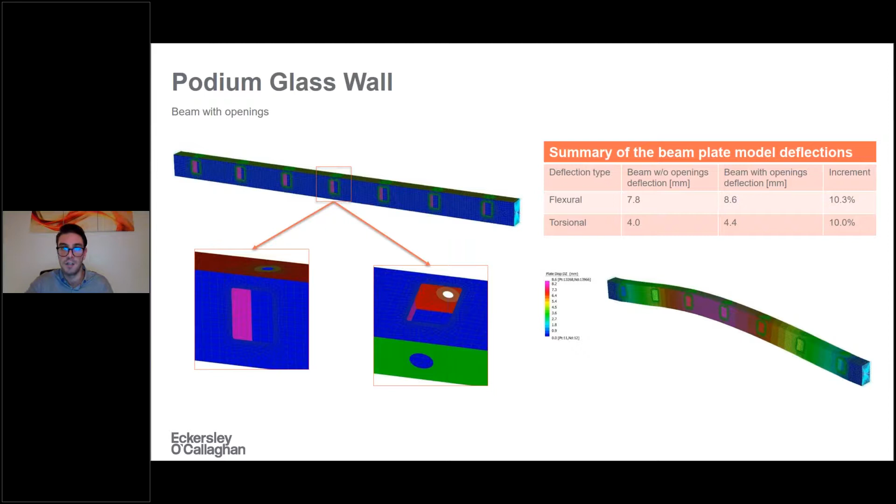I would just want to quickly touch base on also the approval process, which was as tough as going through the design of these things. So we started with a pre-submission inquiry, and in Hong Kong the approval authority is called the Buildings Department. It is quite a tough authority to work through, and you need to really justify every single thing, and you can also understand from the fact that you're not allowed to use composite action in glass unless you do tests. So the process was quite tough and quite interesting.

So we started then with a first BD submission in September 2018, which was rejected with major comments, also depending on the fact that at that time the glass code in Hong Kong switched from one way to another, so there were some slightly different requirements for the glass analysis. So then we had to resubmit in December of 2018 as well, and this submission was rejected, but with very minor comments. They were addressed in January, so straight away one month after, and finally everything was approved by March 2019.

Clearly, there were still a few compromises accepted to ensure that at least in principle the approval was granted, because I should have mentioned that in Hong Kong, from what we know, no large deflection glass facade, even normal cable net facade, has ever been approved because of this high flexibility and high deflection. So it's one of the first facades of this type ever approved in Hong Kong.

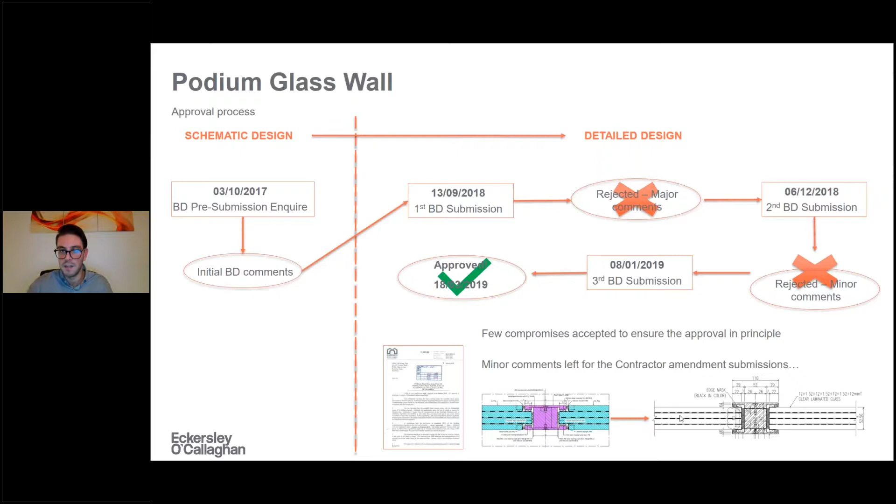So one of the compromises that we had to accept was the one on the clamp between the glass and the rod, which was not allowed to be recessed and therefore have everything flush with the glass. Although the brick models were proving that the glass was okay, and also that the SentryGlas was able to transfer the tension and the shear transfer between the plies, we had to have a clamp from outside, and therefore we had this minimal build-up, minimum depth on top of the glass thickness.

This test was carried out not only as a water tightness test and air tightness test, but there were also some structural tests, clearly with wind load applied up to 1.5 times the design load. So we were basically blowing up to 5.3 kPa of wind on the facade.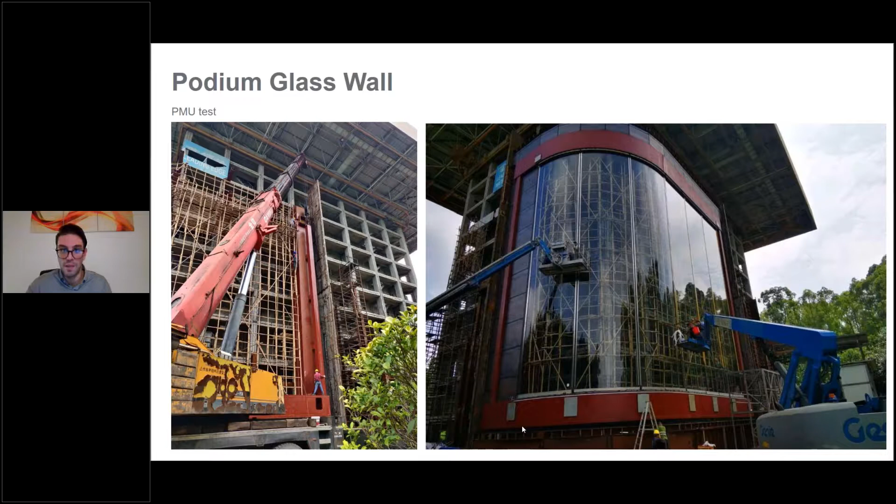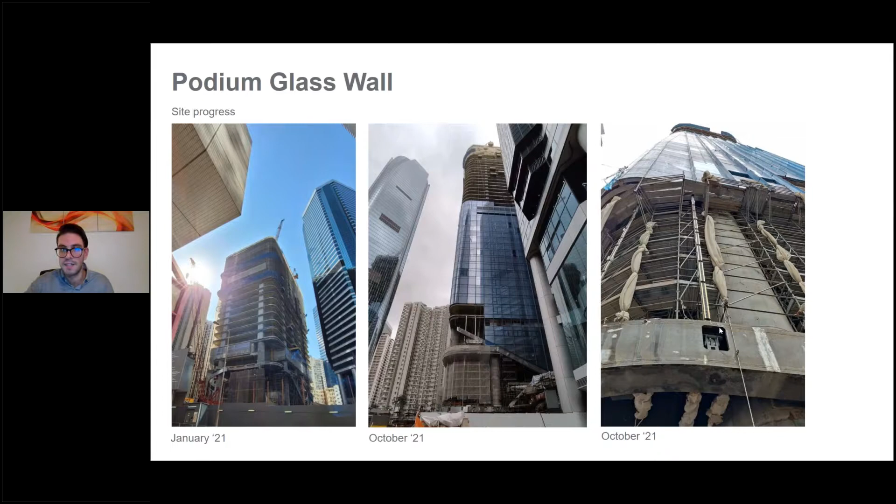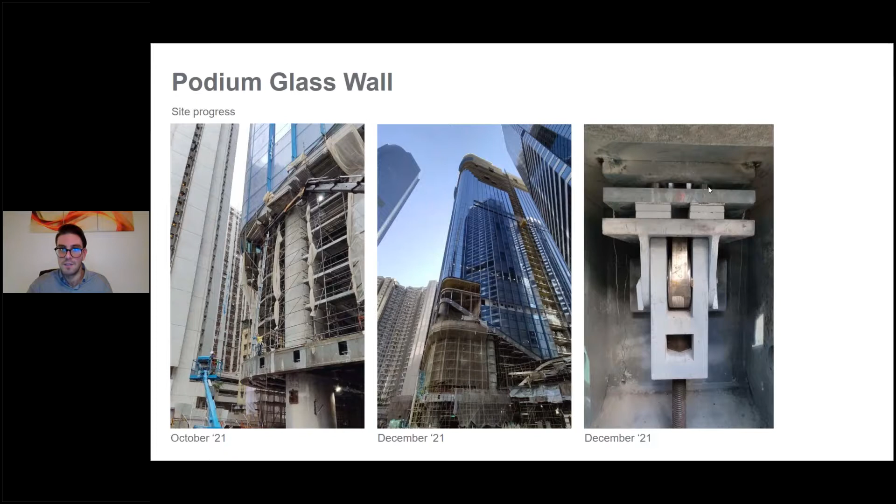Another thing that you can see here, probably not very clear from this image, but these things are load cells, because one of the requirements was that the pre-stress level in the rods has to be monitored permanently. So we have a set of 4 load cells for each of these rods, constantly measuring the tension and transferring the data to the central monitoring of the building through a wireless system. So basically, we have a live prediction and measurements of the tension in the rods, and a warning will be given in case the rod pre-stress and tension level drops below a certain threshold or rises above some critical value coming from the design. And thanks.

Thank you very much, Giovanni, for a very nice presentation. I have noticed that there are 2 questions in the question box for the moment. The first one is from Puri Tamarongtam, asking whether you could comment perhaps about the choice between pre-stress or pre-tensioning rod and the cable.

So yes, basically the main driver for going to rod rather than cables was that typically with cables you would have had a built-in depth of the system. Typically the cables are offset from the glass facade, and then they are connected with clamps across the length of the facade. What we wanted to do here was to minimize as much as possible even this depth. So as you can see from the detail, the rod is basically entirely lying in the buildup of the glass. And also because of the shape, which can be a rectangular shape, it offers a flat surface for having a continuous clamping plate across the full length of the facade. It would have been much more complicated with cable, because probably we would have gone with patch fittings every certain distance, which was probably not what the architect wanted to see. So that was mainly the reason, just trying to avoid any depth of the system and squeeze everything within the glass buildup.

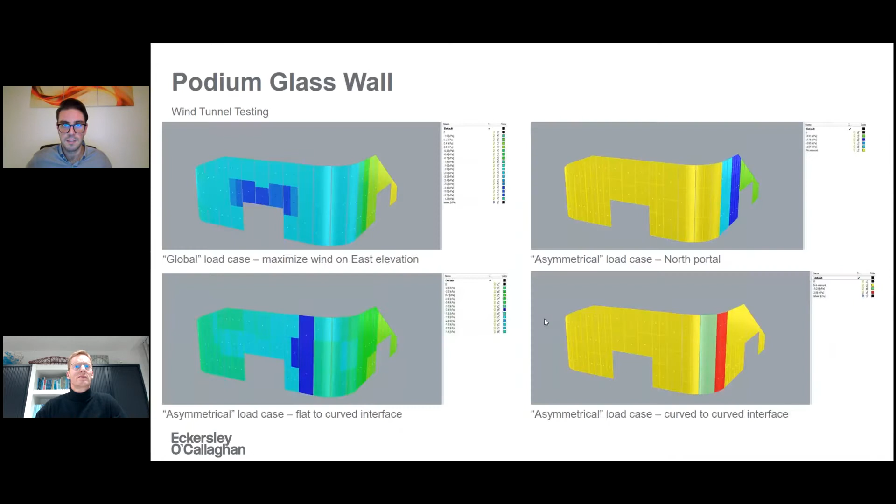Okay, great, thank you. There are a few extra questions which have come in meanwhile. However, I think I have to keep an eye on the timing as well. So what I propose is that we ask you, Giovanni, to answer these questions in a written way in the question answering section. We could also do that after the official part of this presentation. Okay, good. Thank you very much once again.

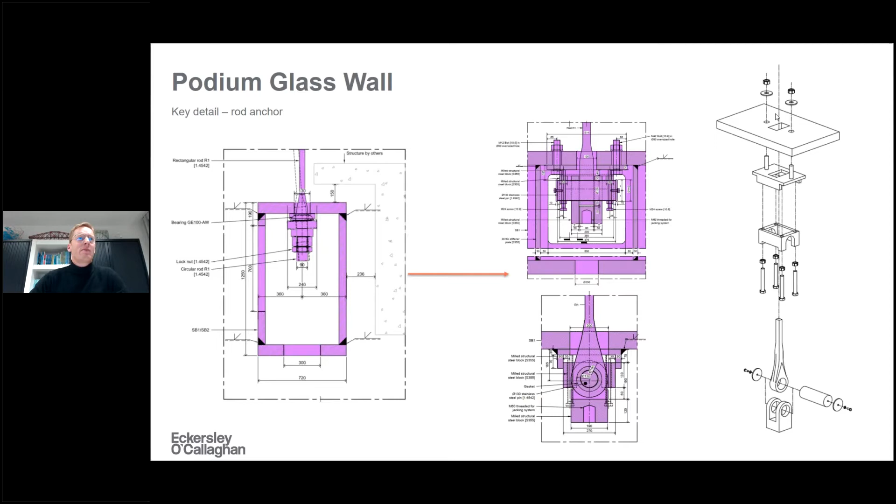I would like to invite now Mauro to share his presentation again, so that we can move to the final part of this Glassinar. And that will be about a prize which we are offering from the journal Glass Structures and Engineering. Based on the papers which have been published in 2020, there is the prize for the best paper, which is called the Best Paper Award 2020. And I would like now to give the floor to Ms. Nathalie Jacobs, executive editor at Springer Nature, responsible also for our journal. So Nathalie, please, floor is yours.

Thank you, Jan, for the introduction. First of all, I would really like to thank the speakers. Your talks were really great. Thank you so much. Now we have come to the moment that we are announcing the 2020 Best Paper Award of the journal Glass Structures and Engineering. And I'm announcing it now. I would like to congratulate Telesilla Bristogianni, Faidra Oikonomopoulou, Rong Yu, and Rob Nijsse with the paper Investigating the Flexural Strength of Recycled Cast Glass. We would really like to congratulate you.